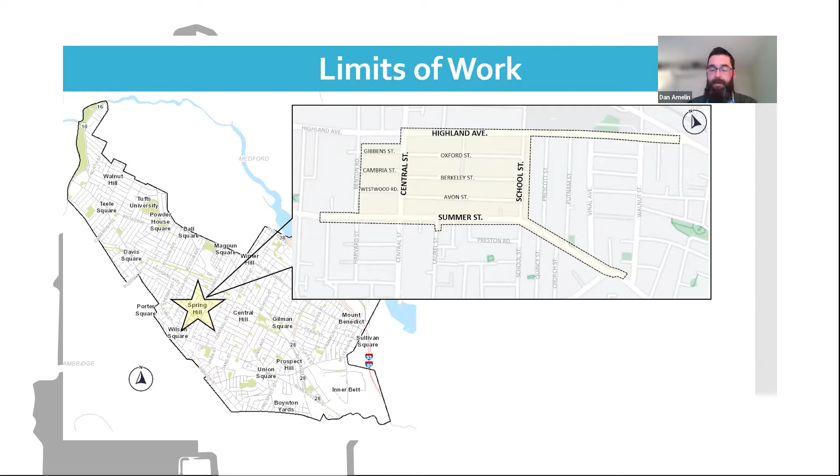And as the name gives away, it's Spring Hill sewer separation. As I get into this project description, I think one of the primary points of focus for this project is separating sewers. Because the city is so old and our infrastructure in different areas is over 100 years old, a lot of our sewer pipes and drainage pipes, way back when, were installed into one pipe only. Our goal here is to separate drainage from sanitary flows. It's an outdated practice - when the system overflows and surcharges, there's the possibility that these empty into the Miller's River or Alewife Brook. In this case, I believe it's the Miller's River.

It's been one of the city's goals, and this is essentially a similar type of project to the Somerville Ave Utility and Streetscape Improvements project that we're nearing completion on. We're trying to take the drainage out of the sewer and have 2 separate systems. Not only does it improve the quality of stormwater that we can infiltrate back into the ground, which is green stormwater infrastructure - I'll get to that shortly - it also reduces the capacity burden on our sewer pipes, reduces the chances of localized flooding, and reduces the amount of waste that needs to be treated through the MWRA, so there's less treatment fees for that.

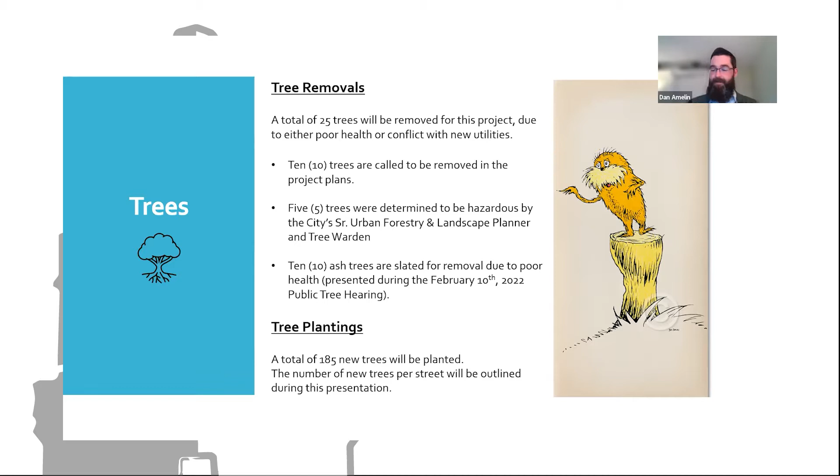Before we get there, one last quick item is our look-ahead schedule. I know the focus of tonight's meeting is on this calendar year's construction season, but I wanted to provide the following two years just for context and to give you folks the big picture here.

At the early onset of 2022, here we are in April, just about ready to start all our underground utility work. Work to date, for folks who've seen GSO out working, has been mostly test pits, tree pruning, tree removals—things they're able to do during winter conditions without fully ripping up the street, given the potential of a snow emergency and parking on one side.

As we get into April, we'll really be starting our excavation work. The focus for this construction season through the fall is going to be Summer Street, from Bow Street to School Street—that's where GSO will be working. They'll also be working on Avon Street, Central Street, and possibly Westwood Road.

All this underground utility work involves excavators and loaders out digging up the road, putting in new drainage, new sewers, and lining sewers. We were able to line a few sewers already, and there are still a few outstanding streets that will be coming soon.

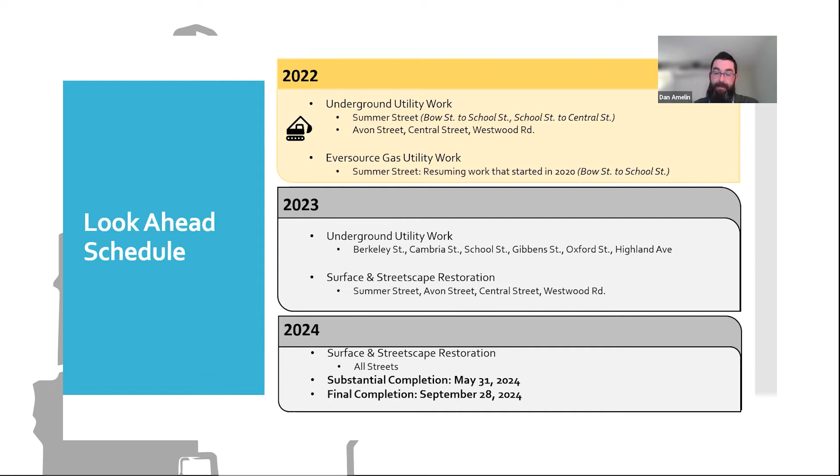So here's the moment we've all been waiting for. This is going to be our breakdown of work. We're going to go street by street, organized alphabetically. So for those on Westwood and Summer, I'm sorry, you're at the end. For those on Avon, congratulations, you're up first.

Before I get into details, I want everyone to understand that as we go street by street, a lot of the work is the same, so I don't want to sound too repetitive. There are different unique elements on certain streets that I can point out as we go. I'll run through the first 2 or 3 streets to give you a sense of what to expect, and then I won't repeat everything. I'll point out unique things and nuances here and there, but otherwise I'll scroll through the slides slow enough so that you folks can read them.

Quick spoiler alert - normally we'd mention this at the end, but this presentation is going to be posted on the city's website, so anyone who wants to refer back to the slideshow will have the ability to do so. So that being said, Avon Street, we're going to start utility work this month.

Surface work won't start until a year from now, next year. So the utility work we're looking to start is CIPP lining. For those who don't know, it's essentially a practice where you take a liner - think of a sock - and it's dragged through an existing sewer main. It's blown up, and then it cures like concrete. Essentially, by doing that process, you've created a pipe within a pipe.

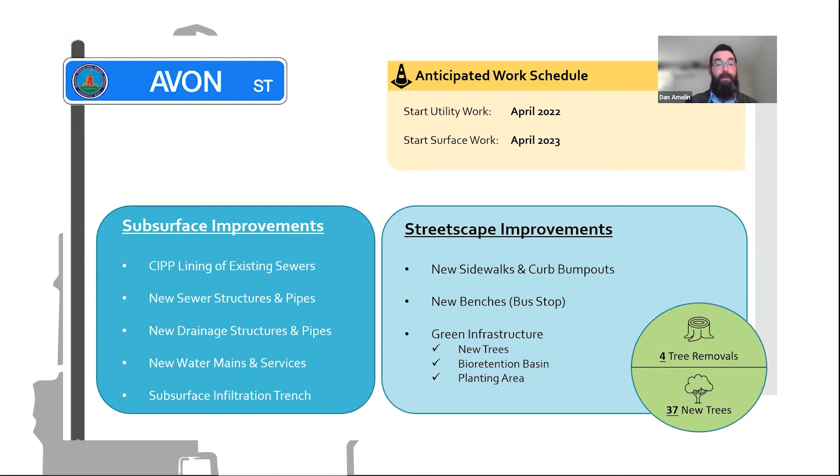Moving on to Berkeley Street. Some of you have already noticed work going on just this week. For those who live on Berkeley Street, Gioso has been installing some drainage, some new catch basins there this week, and unfortunately, they encountered some ledge. So for those who have been hearing constant banging, if you work from home or stay at home, apologies. Not something that we want people to have to suffer through, but unfortunately, it's something we encountered and have to remove in order to get these drainage structures in.

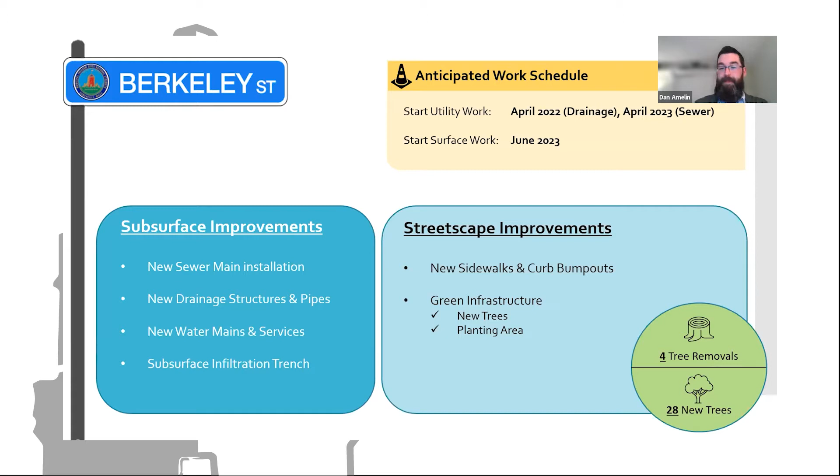Utility work, other than the drainage work, utilities really won't start until 2023. Surface work is going to start summer of 23 in June. Again, subsurface work, underground utility work - this is all things I just previously mentioned: new sewer main installation, new drainage structures and pipes, water main services, another subsurface infiltration trench. For streetscape improvements: sidewalks, curb bump outs, new trees, planting area. Berkeley Street gets 28 new trees, so that's pretty significant.

Cambria Street, a lot of the same. So I'll just leave this up here for a few seconds.

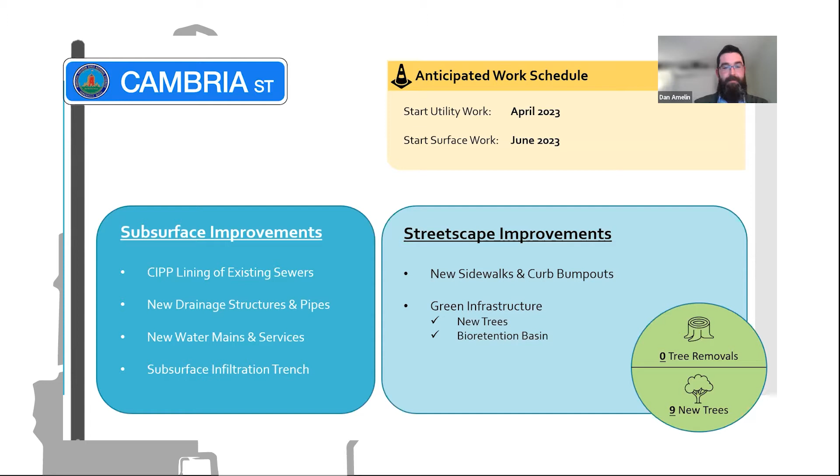Carter Terrace, I will say, because this intersects with Summer Street, work on Carter is going to start this month as they continue working on Summer. And there will be a raised crosswalk at the end of Carter at Summer Street. That's a unique feature I want to point out.

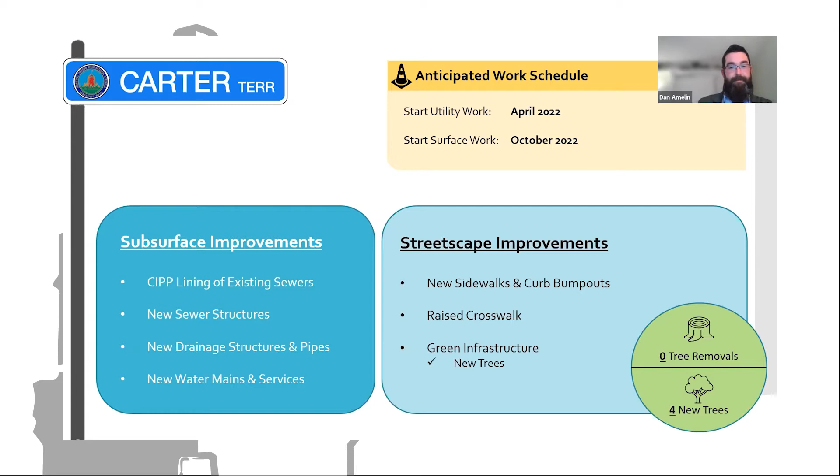Central Street, I'll spend a little bit of time talking about because that is one of the streets we'll be working on pretty heavily here this spring and summer. A lot of the subsurface improvements are the same things I previously mentioned. One thing I do want to note for streetscape improvements is the flexible porous asphalt sidewalks.

What that is essentially, for some of these existing trees and large diameter trees that have such an extensive root system, where we wouldn't be able to install a concrete panel behind it without chopping all the roots out and potentially harming the tree, there is this product, this flexible porous asphalt, that allows us to provide a smooth walking surface that's safe over existing tree roots without damaging them because it's porous. Any runoff from the asphalt sidewalk or any rainwater is going to go right through that back into the ground.

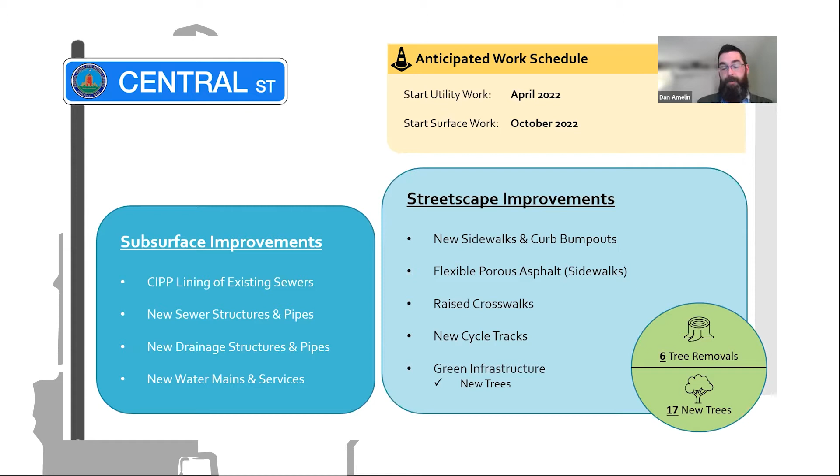Another key thing I do want to mention is on Central, both sides of the street, we will have new cycle tracks. I believe they're elevated off the roadway, so there is that vertical buffer, so to speak, that we'll have at the end of this project. There's Gibbens Street.

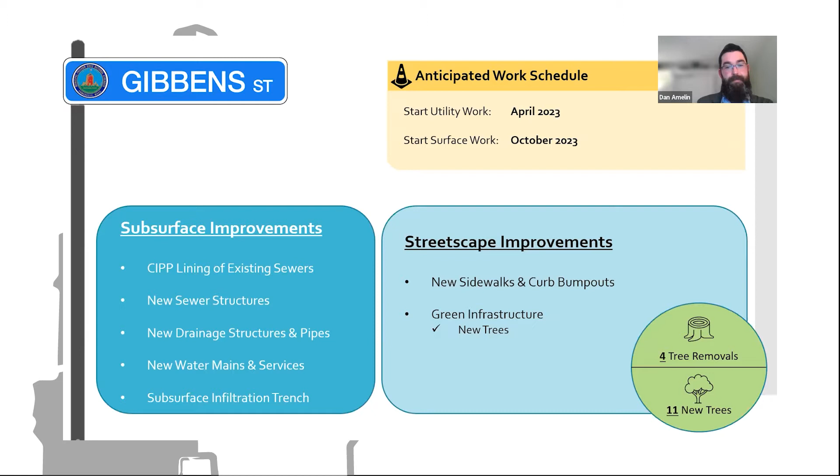Highland Ave. The probably most important thing I do want to mention about Highland Ave is through this project, we're only addressing subsurface utility work. There won't be any streetscape improvement component of this project. Knowing how much work is going on just on Highland Ave, and especially with all the work at the high school, it was decided not to include any of this streetscape work in this project. Instead, a separate future project will incorporate these new designs in roadway resurfacing.

At the completion of this project, because we do have utility work on Highland, it will be permanent trench paving to restore all the trenches that we need to do for all the drainage and sewer work and water main work that we'll be performing.

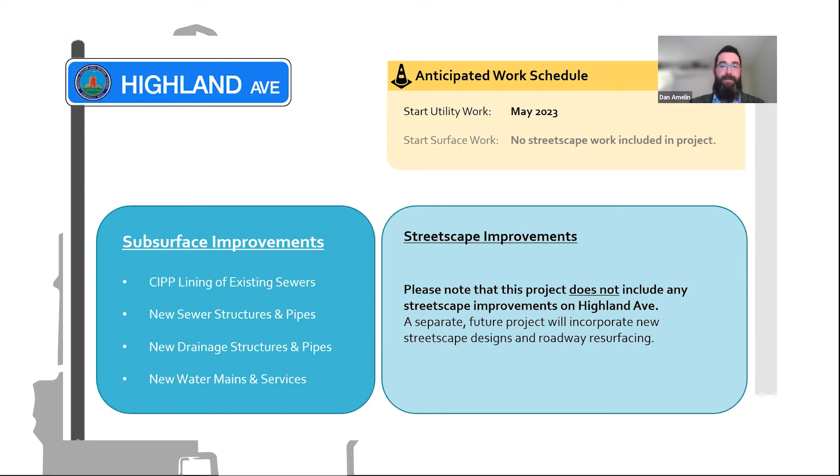But from this project, Dan, we're not doing any sort of bike improvements. This is mainly just subsurface work, and then there'll be subsequent meetings to discuss any sort of bike lanes, removal of parking. That's another project. I just want to make that clear because I'm sure we'll get that question. 100% correct. Yeah. So all of that's going to be in a separate future project, not included in this Spring Hill sewer separation. Spot on. Thank you.

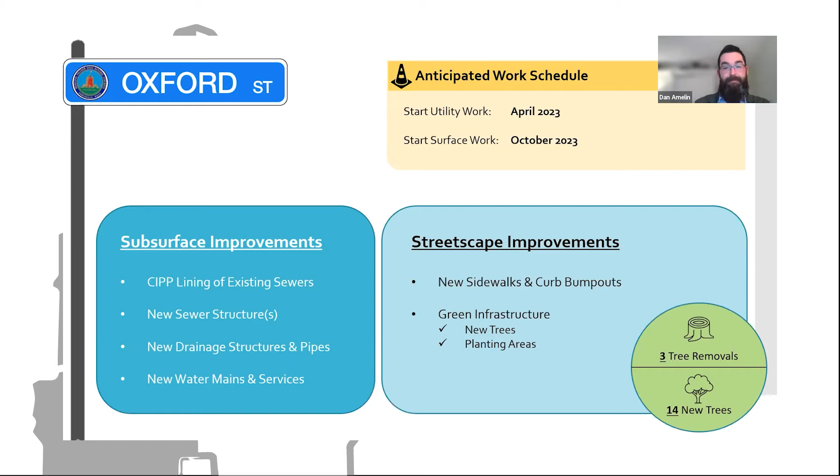Moving on to Oxford Street, a lot of the same. School Street, a lot of the same. One thing to note is, given the direction of travel on School Street, knowing it's a one-way southbound, there will be speed humps installed once we pave as a traffic calming measure.

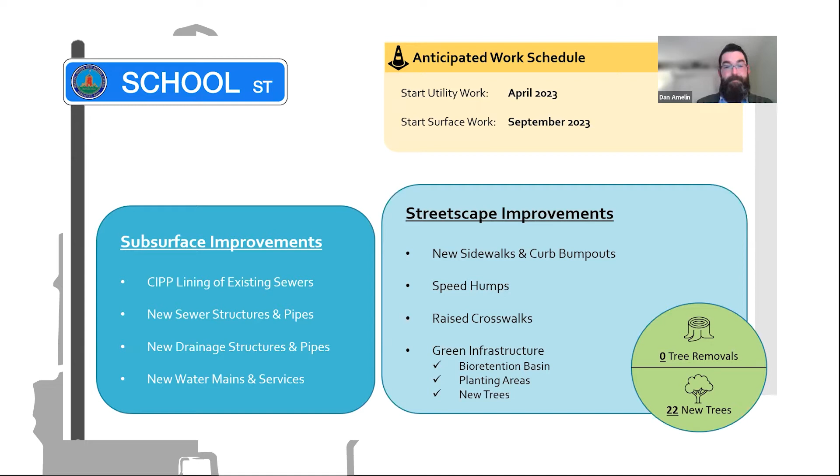One of the coolest features I think this project has is specific to the intersection of Quincy Street and Summer Street. For those who are familiar with that intersection, there's kind of this big radius that's currently striped out there with kind of dead space asphalt in the middle. Those who are familiar know what I'm talking about.

We're actually going to turn that into a little pocket park, with new plantings, new benches. It's going to have permeable pavers, bike racks. So it'll be a nice place for those walking up and down the street, for anyone cycling to kind of stop, head over, take a seat, relax, and enjoy all of the new work this project has to offer.

Another quick thing on green infrastructure. As you can see, Summer Street, given the length, is actually one of the better streets to try to incorporate as much of this green infrastructure work as we can. So this is kind of the top tier, so to speak, of what's on the menu. We've got bioretention basins, irrigated planting areas, subsurface tree trenches, and 38 new trees. So it's exciting.

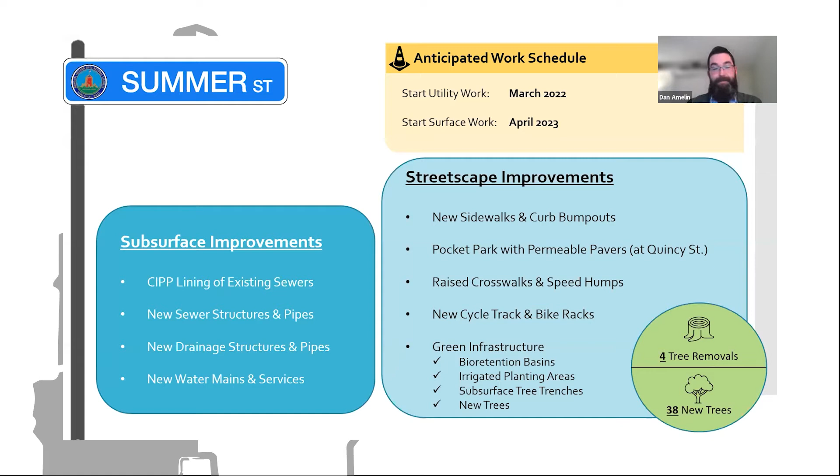And then lastly, Westwood Road. Thank you for waiting. Sorry to keep you waiting, all the residents from Westwood. This is another street marked for construction this year, similar to Summer, Central, and Avon. I won't go through all the features again, but it's pretty much the same as some of the other slides you've seen. New sewers, new drains, lining portions of existing sewer, new water, et cetera, et cetera.

And as we're now at Westwood, I just want to mention, for those who live on Hersey Street or Trull Lane, I didn't forget you. Because your streets aren't very long, and please don't take offense, most of the work that's happening that you would consider on either of those streets has been mentioned for Oxford Street or Berkeley Street or so on and so forth.

So I think for residents on Trull, a private developer at 124 Highland has been doing work. They installed a new water main on Trull Lane, and they'll be installing some new drainage on Trull Lane that will be tying into, or vice versa. So I just wanted to quickly mention that, because unfortunately we don't have slides for those two streets.

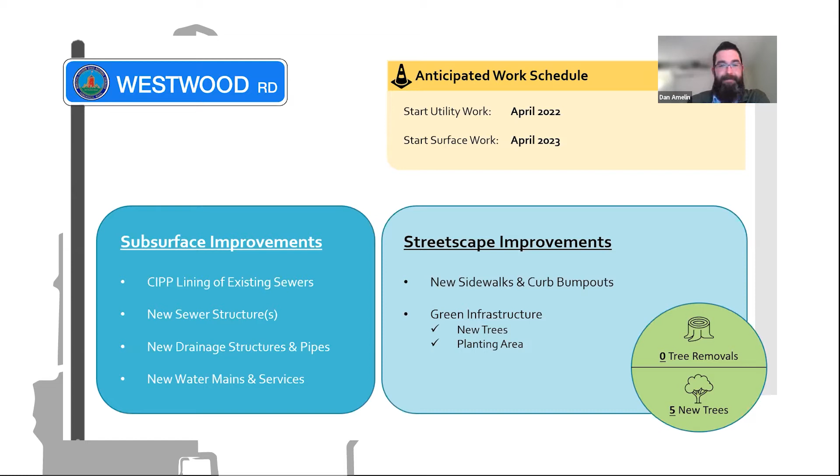Great. All right, so we've talked about the project and kind of what to expect. Now we've got to talk about the most important issue: how do you get in touch with us when you have questions? This is going to be a 3-year project, and something's going to come up. It's inevitable. So we want to make sure you, the viewers, know how to get in touch with us and who to get in touch with. So next slide, please.

All right, so I'm your main contact. As a construction liaison for the city, I handle any sort of coordination and communication of all our projects. You can email me, you can call me, that's my cell phone. I will answer when you call, unless I'm in a meeting, or you can tweet at me. If you were unaware, I run the Somerville infrastructure account. If you follow me, thanks.

Dan is really handling the project. So I will talk to Dan if I think there's something that we need to come together on and talk to the contractor, but most of the stuff I try and handle myself so he can deal with this project as well as some other projects that he is managing.

We have a centralized email address. This is what we actually set up about 4 or 5 years ago when the Green Line really went heavy. It's construction@somerville.gov. This goes to multiple people in the engineering department as well as some people in the communications department, and allows us to kind of triage the issue. Usually it actually is myself or Erica Mace, our public information officer, who will answer, but it allows a lot of eyes on the issue.